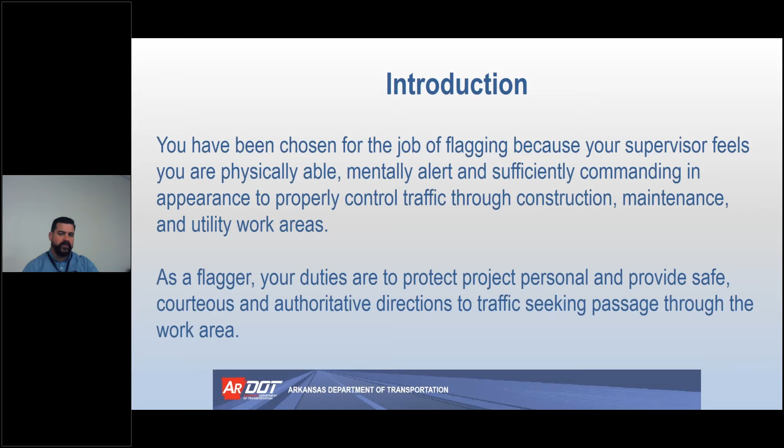Okay, moving along. So you have been chosen for the job of flagging because your supervisor feels you are physically able, mentally alert, sufficiently commanding in appearance to properly control traffic through construction, maintenance, and utility work areas. As a flagger, your duties are to protect project personnel and provide safe, courteous, and authoritative direction to traffic seeking passage through the work area.

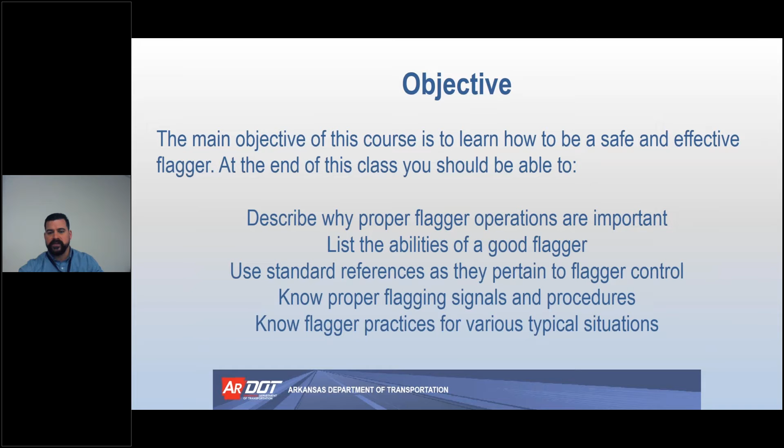The objective of this course is to learn how to be a safe and effective flagger. At the end of this course, you will be able to describe why proper flagger operations are important, list the abilities of a good flagger, use standard references as they pertain to flagger control, know proper flagging signals and procedures, and know flagger practices for various typical situations.

So let's start off with what depends on you. Well, first and foremost, the folks working need your protection. You're the first line of defense to the folks working behind you in the work zone. Motorists need you, they need your guidance. Pedestrians, similar to motorists, are going to need your guidance as well.

There's potential for pedestrian crosswalks to come across temporary traffic control zones, and you're going to need to know how to navigate those pedestrians through there, within a parameter. You're not a crossing guard, but your role will help them. Same goes with bicyclists and children. They may pass through a temporary traffic control zone as well. There may be a bike path. Again, you're not trained to direct students in a school crossing. In a lot of areas, that's a program that employs crossing guards.

How about equipment and materials? You also need to protect those. Both equipment and materials are expensive, and we don't want anything to happen to that investment.

You have the power to affect people's lives. Did you know that each year hundreds of people are killed or injured in temporary traffic control zones? Thousands are injured and millions of dollars are lost in property damage. The decisions that you make and the actions you take can be the difference between life and death.

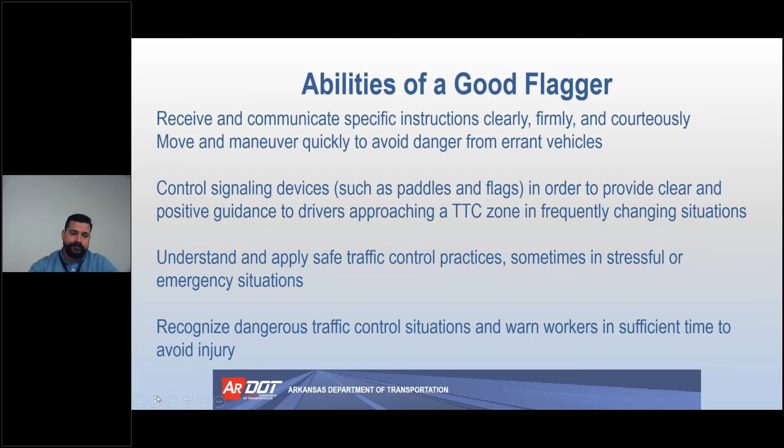So let's talk about standards and guidelines. Everything we're going to talk about today can be found in a number of places, but its origins are in the Manual on Uniform Traffic Control Devices, or better known as the MUTCD. You may have worked with the MUTCD before, or you may have worked with your local best standard practices, but everything originates from the MUTCD.

Even OSHA pulls their temporary traffic control information from the MUTCD. The MUTCD is a document required by federal law to be prepared and published by the U.S. Department of Transportation and the Federal Highway Administration. It changes frequently and is published primarily for state DOT use. Each state is required to use this manual, or one of their own design, for all traffic control on streets and highways under all circumstances.

So the MUTCD is basically the Bible of traffic control. The flagger control is just one part of it, and it's covered in Part 6. These standards may also be found in state and local standards and guidelines, which are particular to the state and area in which you will be working as a flagger. If you work in a number of different areas, you may be required to work according to those local standards and guidelines.

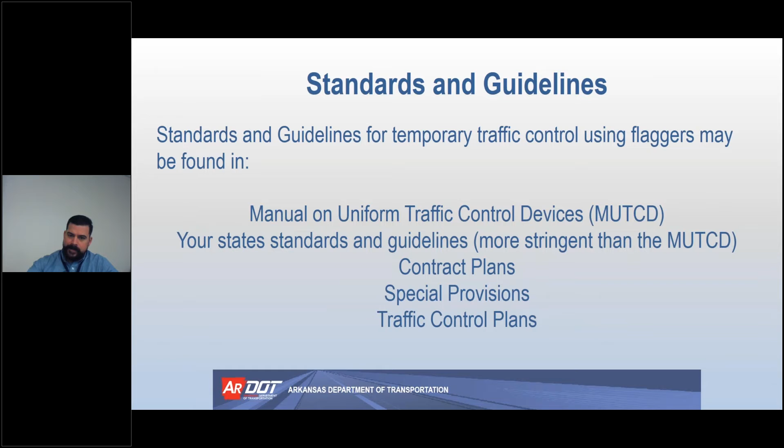And just to show you what the MUTCD looks like, here's my old ragged MUTCD. To give you an idea of size and scale, it's about 11 by 9 and about 2 inches thick. There are 9 parts, kind of like chapters, but in total the 9 parts add up to over 800 pages in this thing. So these 9 parts are pretty big parts.

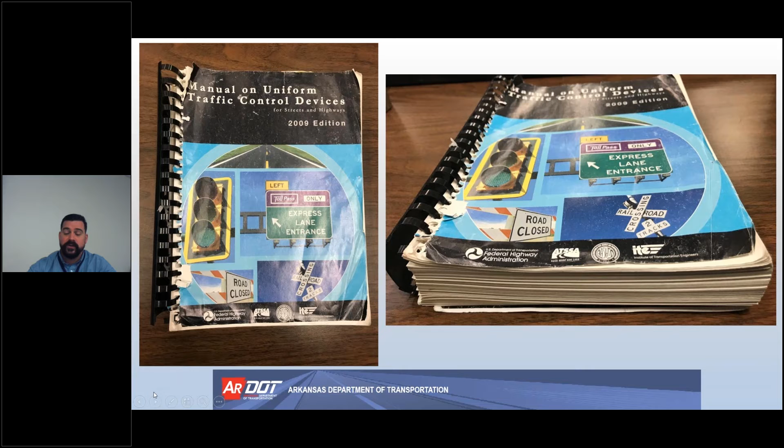Again, this is the Bible of temporary traffic control. You can see the last time it was updated was 2009, and this is the most recent MUTCD out there. I've been told that it's going to update soon, but I've been told that for a lot of years, so we'll see. Until they do, this is it.

An easy way to remember some standard key points about flagging is the flagger ABCs. Before you start flagging, you need to have your advanced warning signs out. You need to be visible and alert at all times, and you need to control traffic with the appropriate procedures. So: advanced warning signs out, be visible, control traffic with the appropriate procedures. If you can remember those three things, you're on the right track.

Okay, now we're going to get into some of the practical parts of temporary traffic control and flagging.

Before you can flag, you need to know what a temporary traffic control zone is. The entire area where traffic is affected is called the temporary traffic control zone. It includes the area from the first sign drivers see until the very last device where drivers know to return to normal traffic patterns. There are 4 primary areas that make up the traffic control zone that are important for the flagger to understand.

For most things throughout this course, and for the most part tomorrow, we're going to look at this specific type of temporary traffic control zone because it applies most to flaggers. It is called the one lane two-way traffic condition or traffic control zone, or mostly referred to as the flagger taper.

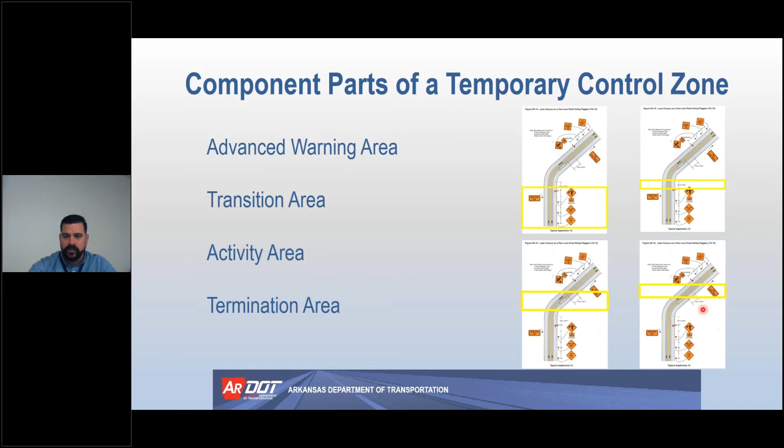Here we're looking at each one, let me get my pointer out. So here we are: the advanced warning area, transition area, activity area, and termination area. Don't squint your eyes too hard looking at this, we're going to talk about all 4 in detail.

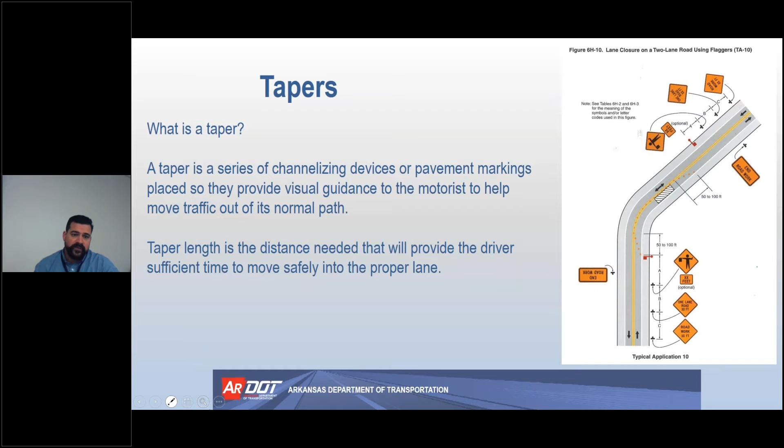More briefly, let's go over tapers. So what is a taper? A taper is a series of channelizing devices or pavement markings placed so they provide visual guidance to the motorist, to help move traffic out of its normal path. Taper length is the distance that will provide the driver sufficient time to move safely into the proper lane.

And here's the one-lane two-way taper, also called the flagger taper. I just want to show it to you in better detail. It looks like you can see it okay, I'm looking at it on my other screen. It's the most common taper used in flagging operations. You'll need to know more about tapers if you're required to place traffic control devices and make sure they are set properly.

But being familiar with this and other types of tapers, especially when we talk about them tomorrow, you'll be familiar, because if you feel something is not right, you need to notify your supervisor immediately that something isn't set up right.

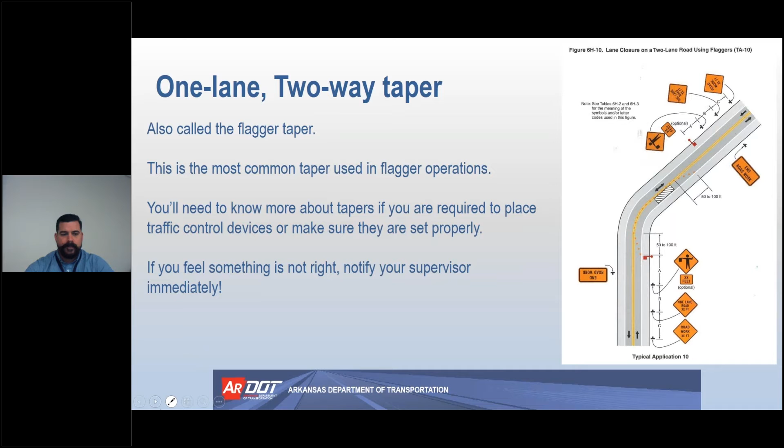All right, so the advanced warning area. The advanced warning area is the first indication to motorists that they are about to enter a work zone. Signs are primarily used to communicate several things to the motorist.

The first sign, so if traffic is coming this way, this is considered the first sign motorists see. It's a warning sign. Generally, the road work ahead sign is used for that first sign. Sometimes they'll substitute that out with a distance instead of ahead, so road work 1,000 feet ahead or something like that. This is there to alert motorists that they are approaching a work zone.

The second sign is placed to inform motorists of what is expected ahead. So, for example, one lane road ahead, or similar to the road work ahead, one lane road 500 feet - that's also acceptable. Then the third sign should be the flagger. The third sign is placed to tell motorists what to do. So there's a flagger ahead, or the flagger ahead sign with a distance, so flagger 300 feet ahead, or just the flagger man, as we'll call them. You'll also see that sign as well. But that flagger sign, it's telling motorists hey, there's a flagger there, and that sign has to be up before you can even start flagging.

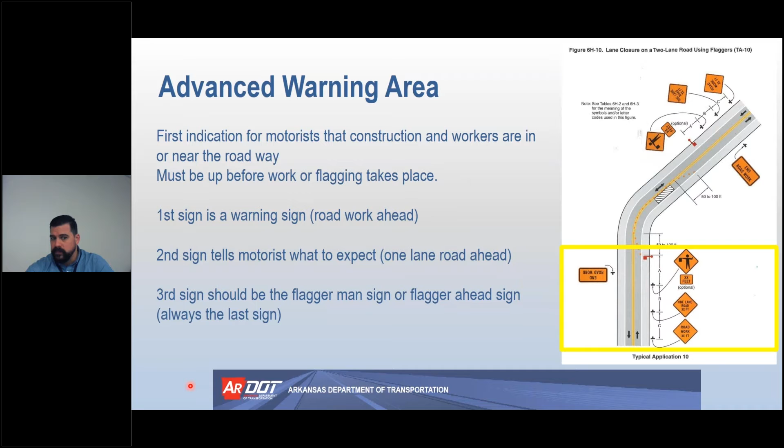Okay, so a little bit more on the advanced warning area. The distance, so the sign spacing between each sign in the advanced warning area is depending on road volume type. This table 6C-1 is found in the MUTCD. Like I said earlier, flagger and really all temporary traffic control is found in part 6 of the MUTCD, and you can find this chart in there.

I'd like to also say that you can find the MUTCD online for free. It's accessible to anybody. Just Google MUTCD, and you could even get more specific. Google table 6C-1, MUTCD, all this information. It's not secret information, it's very accessible. So if you have questions and don't feel like pulling out this big old book, just Google it.

But here we're talking about the distance between each sign. So the distance between road work ahead, one lane road ahead, flagger man sign, in the advanced warning area, that's all dependent on speed. Urban low speed is 100 feet between each sign. So 100 feet for roadwork ahead, 100 feet one lane road ahead, 100 feet between flagman ahead.

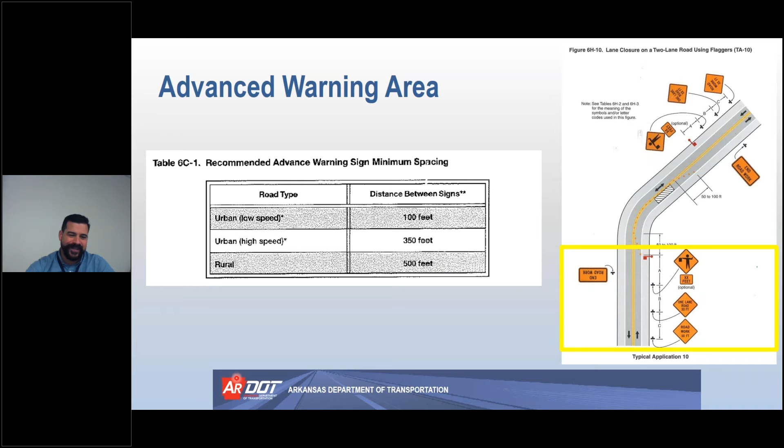All right, the transition area is the area that follows the advanced warning area. So again, we're looking at the flagger taper. The standards I'm going to talk about now are specific to the flagger taper. We'll talk more broadly about transition areas as we look at more tapers, and that'll be tomorrow's course. But for the transition area for the flagger taper, it follows the advanced warning area and is where the motorist is directed to travel in order to get through the work zone.

Motorists need time to make changes in the roadway, so in order to provide time, we provide a distance. This distance is called the taper. This is the distance right here. It is a line of channelizing devices that is visible and provides driver guidance. The length of the taper is measured along the line of travel, which is here. So you're not measuring this diagonal taper, you're measuring along this line here, or along the shoulder.

Flagger operations are normally done on roadways with speeds between 20 and 55 miles per hour. Again, if you start getting to 60 miles per hour, no flaggers, that's too dangerous. So the taper length is used in the range of 50 feet minimum to 100 feet maximum. At the lower range of speeds, the 50-foot taper may be used, with the longer taper being used as the speed increases. So essentially, lower traffic speeds, you want a shorter taper; higher traffic speeds, you want a longer taper. That's to give motorists more time to stop—the faster they're going, the more time they need to stop.

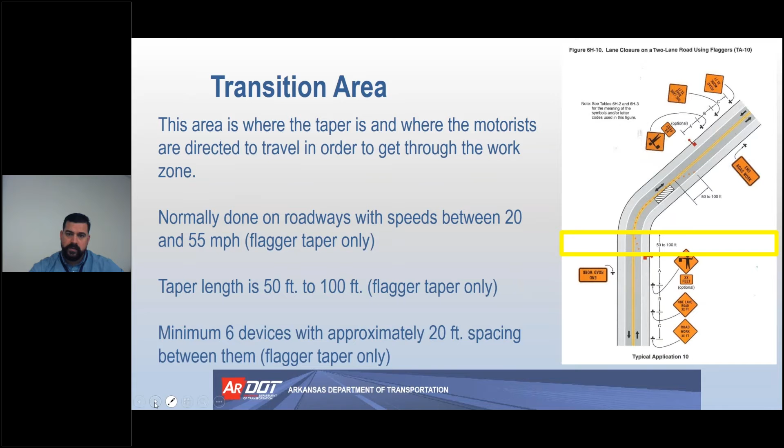We're going to talk about that in more detail here in a little bit. So we have the advanced warning area, the transition area. The next area of the traffic control zone is the activity area.

The activity area follows the transition area and is made up of the workspace and the longitudinal buffer zone. The workspace is where all the manpower, equipment, maneuver room, and storage materials are contained. The space is determined by the project and is generally not the responsibility of the flagger to determine how much space you're going to need for the activity area.

The workspace is preceded by a distance called the buffer space. It is an area or space providing motorists who may have lost control of their vehicle the room to recover and stop before entering the workspace. This space is always kept empty of any objects that could cause damage to vehicles or occupants.

At this stage of the MUTCD, the buffer space is not required in temporary traffic control zones. It's an option, recommended but not always feasible. Space is always an issue when working on the road, so sometimes a buffer space isn't possible. But if you do have one, and it's recommended if you can, there's nothing in it.

All right, the activity area. Let me get my pointer out here. So here's the buffer space—nothing in it, right? And this box with diagonal lines is considered the workspace. There's nothing in here; this is where everything goes.

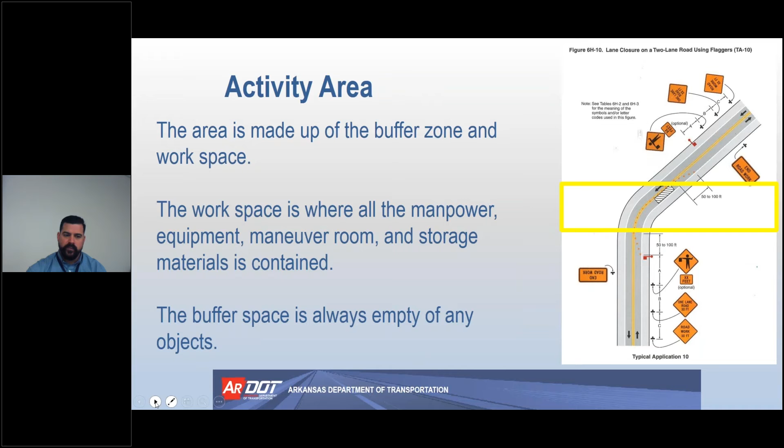A little bit more about the buffer space. Here's another table found in the MUTCD, Table 6E-1. It has a really fun name: Stopping Sight Distance as a Function of Speed, more easily known as the buffer space table. The distance to use for the buffer space is determined from the data shown in this table.

It's real easy, right? If it didn't have a complicated name, it'd just be, hey, go to the buffer space table. So first, what's the speed limit? It's 20 miles per hour. Okay, that buffer space needs to be 115 feet long. And that's all there really is to it.

Generally, flagger tapers are going to be in a travel way with speed limits of 50 miles per hour, so that buffer space is going to be 425 feet. It's not a difficult table to read, just that sometimes that title will throw folks off. But I bet if you Googled buffer space table, this would pop up.

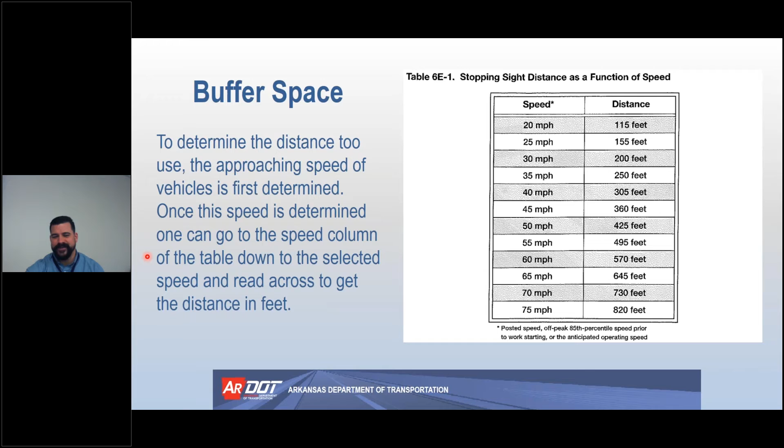And lastly is the termination area. In the termination area, information is provided to the motorist to indicate that traffic has come to the end of the project. A sign such as End Road Work or End Utility Work, or whatever activity is taking place that the temporary traffic control plan recommends, is placed at the end of the termination area, at the end of the temporary traffic control zone.

It needs to be clearly visible, but similar to the buffer space, this is not required—it is recommended, but you don't have to have one out there. But if you do, it needs to be clearly visible and clearly indicate what is happening. A termination taper or downstream taper, when used, helps folks move back into the regular travel path, similar to the flagger taper at the transition area—that was 50 to 100 feet, and this termination taper is also 50 to 100 feet. Really easy to remember.

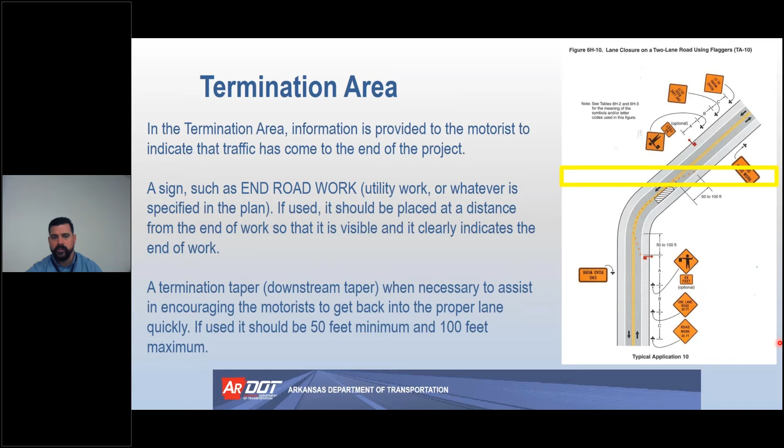All right, so channelizing devices. Channelizing devices mean delineation of the edges of the travel path that provides visual guidance to the driver. It is equipment used to divert traffic from its normal path. Channelizing devices are essentially cones, drums, tubular markers, and barricades. I'm sure everybody here is familiar with them, but like I said earlier, depending on the situation and what the traffic control plan recommends will determine what channelizing devices you use. We'll talk about each one of these briefly.

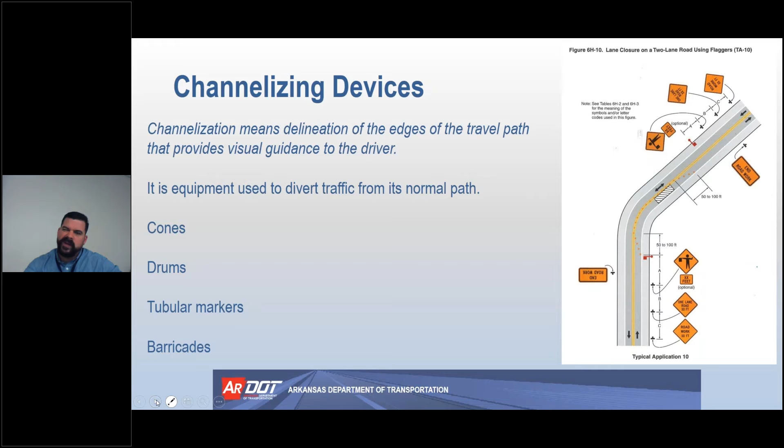First off, cones, probably the most familiar channelizing device there is. Even the layman knows what a cone is, but most cones are predominantly orange. In fact, most signs and devices in a temporary traffic control zone are orange. It's the main color, synonymous with construction and maintenance.

Why do you think these colors are important to channelizing devices? Well, they allow the device to be seen and to stand out. Cones must be a minimum height to be seen as well. They must be at least 28 inches high on high-speed roads, so roadways where the speed limit is 45 miles per hour or more, or they need to be 28 inches for nighttime work as well.

And they need to be at least 18 inches tall on other types of roadways. If cones are used at night, they need to be seen, so they must be either lit externally or retroreflective. In fact, I've actually seen cones that are internally lit.

If anybody has any questions about what retroreflective means, if you wear a safety vest, you probably know what retroreflective means. But essentially, retroreflective material is light from a source that will bounce off an object and return to the source. Most cone manufacturers will put bands of white retroreflective material around the top of the cone. While not required for daytime work, nighttime work requires some form of light, retroreflective or internally, externally lit.

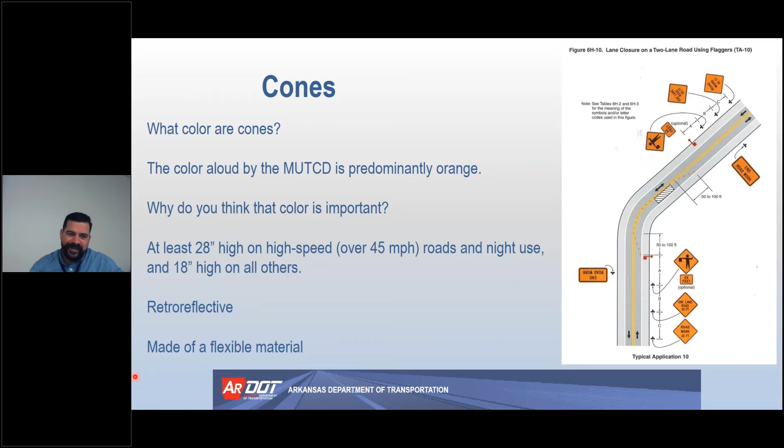Signs. Other temporary traffic control devices you'll see on the job are signs. There are three basic types of signs: regulatory, warning, and guide signs. Regulatory signs enforce legal requirements, so we're talking about a stop sign or a speed limit sign. Warning signs alert drivers to specific hazards, so we're talking about a flagger ahead sign or flagger man sign.

And guide signs give drivers information, so in that case we're talking about an end road work sign. Signs have different shapes and colors, which convey different meanings. So again, what meaning does an orange sign convey? Temporary traffic control. And for the most part, temporary traffic control signs are diamond shaped.

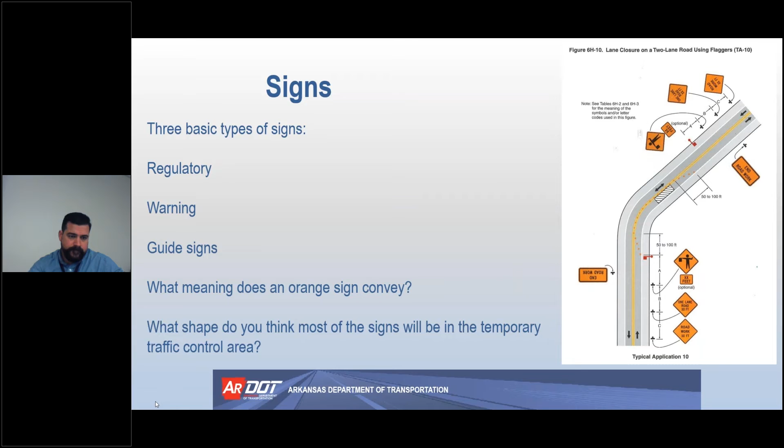Traffic control plan. So we've kind of hit on this already a little bit. The traffic control plan may show the exact sign required or refer to a number sign in the MUTCD. You'll need to check the plans or ask your supervisor to ensure the correct sign will be used. Essentially, the traffic control plan tells the person setting up the traffic control what needs to be where, in what location.

Before you get out on the road, you should have a traffic control plan. I know that doesn't always happen, but it should. And the traffic control plan doesn't need to be this drawing done on CAD, that's colored and numbered, and it doesn't have to be anything too detailed. It just needs to give a framework of what needs to go where on the roadway.

It not only needs to have what signs need to go where, but it also needs to say what that sign's spacing is and how many channelizing devices are along the buffer zone and the activity area. Is there a buffer zone? That also needs to be in the traffic control plan. Is there a termination taper? That needs to be in the traffic control plan.

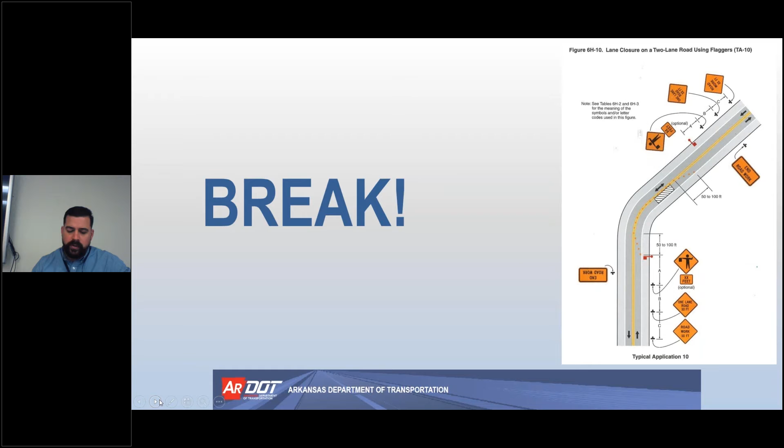Now we're going to move into what you need to have out there with you as a flagger. So first we'll hit on equipment or apparel.

For daytime work, the flagger vest, shirt, or jacket shall be either fluorescent orange-red, or fluorescent yellow-green, as defined in the standards. ARDOT, so I can speak to ARDOT, we use the fluorescent orange, but I know contractors really like the fluorescent green, fluorescent yellow. Your agency or municipality is going to determine and tell you what you need to wear, and it doesn't matter the color, but it needs to be within that range of colors. It's whatever color your agency or municipality tells you to wear.

For nighttime work, similar to outside garments, they need to be retroreflective. The retroreflective material shall be either orange, yellow, white, silver, yellow-green, or a fluorescent version of these colors, and shall be visible at a minimum of 1,000 feet. Apparel for daytime and nighttime needs to be ANSI Class 2 standard.

For nighttime work, it's encouraged that you use a Class 3 standard, but it's not mandatory. And that's always surprising - I've been saying that for years, and it's still surprising every time I say it. Now for ARDOT, we require Class 3 no matter what.

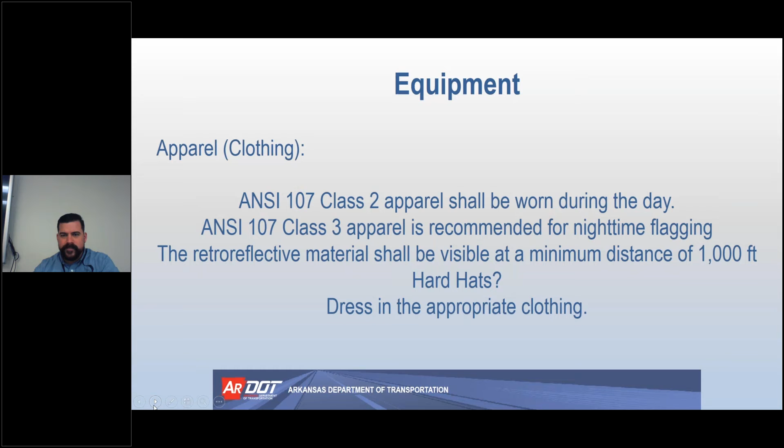And actually, if I don't have an answer to a question, I have got one of the senior health and safety officers sitting right in front of me who can answer questions. His name's Jason, and he came out of maintenance and has been in the safety role for a long time, so he can always provide us with his insight.

All right, moving along. Ross, sorry to interrupt, we did have one comment from Greg that says OSHA requires class 3 at 55 miles per hour and up. Okay, that is news to me. I wonder, is that a new standard, Greg? Or is that something you guys have done for a while?

I don't know what I did here, but okay. Part of the reason why I might not be really familiar with the OSHA standards in terms of that is ARDOT is actually OSHA exempt, so there's some confusion there at times.

Okay, and so he said that he will find the regulation and send it over to you. Great, thank you. Since everyone online is muted, we're just depending on the typing into the questions in the chat. Thanks, Greg, I appreciate that.

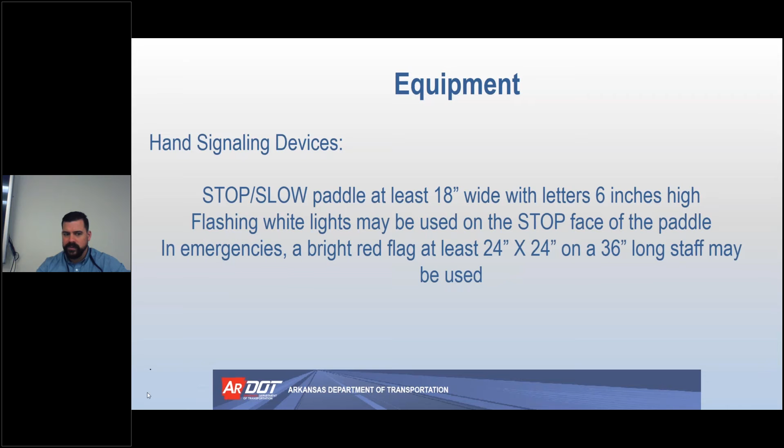What about personal comfort items? Depending on the day, the situation, what's going on, you're going to want to have different things out there with you. It can be pretty miserable flagging at times, so let's try to make it as comfortable as possible. The bug spray, right?

Especially in the summer, Arkansas can have some pretty rough mosquitoes, some pretty aggressive mosquitoes. Other things, ticks. A few years ago I was doing a field inspection, and the flagger told me he was standing away from any vegetation on the shoulder, and he was telling me that ticks were walking out of vegetation across the shoulder to get to him. You're not going to be a good flagger if you're itching, getting bit, running from ticks. It's okay to have bug spray out there with you.

Same with sunscreen. ARDOT has become a huge advocate for sunscreen. We're giving sunscreen to all of our crews, we're doing safety meetings on sunscreen. You don't want to sit out there in a short sleeve shirt and no hat and just get baked by the sun in the summertime. Skin cancer is real, and you should do everything you can to mitigate that risk.

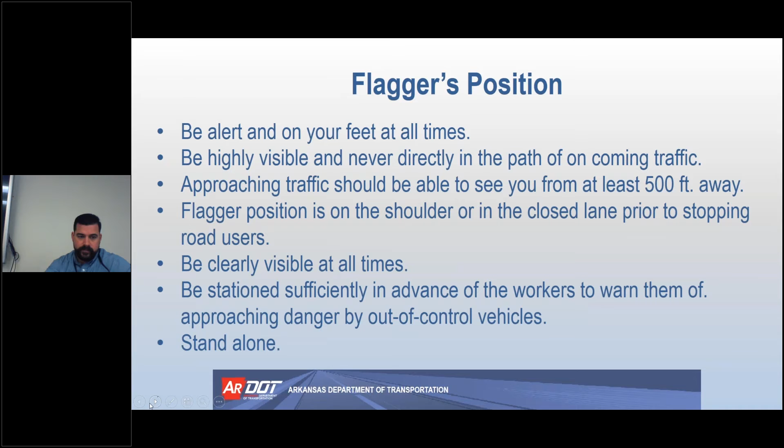Okay, so flagger station location and position: there are three critical factors in selecting the flagger station. You need to identify the limits of the workspace. That's going to be determined by your temporary traffic control plan, and that's up to your supervisor or engineer—they'll say this is where the location needs to go and how much space you need for the workspace. It's usually not up to you as a flagger.

You're going to need to determine the speed of the approaching traffic, select the proper buffer space, and measure it from the workspace upstream. Remember that buffer space table we looked at earlier. You determine the speed of the approaching traffic, then look at the buffer space table and say, okay, it's 55 miles per hour, so the buffer space needs to be X length long from that activity area that my supervisor or engineer determined.

Then you're going to select the proper taper length. If we're going to go with the standard flagger taper, that proper taper length is 50 to 100 feet, depending on the speed limit. So if the speed limit's 30 miles per hour, why don't we just go ahead and make that taper 50 feet long? If the speed limit's 55 miles per hour, let's go ahead and make it 100 feet long.

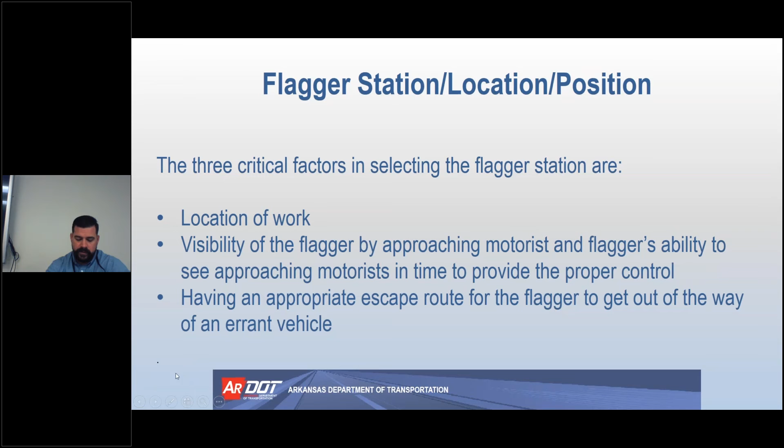Similarly, you need to get away, because while you're getting away, you're going to be yelling at everybody else working behind you to get out of the way, to watch out, there's an errant vehicle coming. So don't lean up on a vehicle. There shouldn't be any walls. Flagging on a bridge is a really bad idea. You don't want to have to jump off a bridge to get out of the way of an errant vehicle. Having an escape route keeps you and everybody else safe. Make sure you have one before you get out there.

Okay, so where should you stand? We are looking at the flagger taper again. These arrows right here identify where you as the flagger need to stand. As traffic approaches, always stand near the shoulder, near the beginning of the taper. Never stand in the open lane. So here, you're standing on the shoulder. You're not standing here, or here. If your flagger station is here, you're not standing anywhere out here. You want to be on the shoulder.

But once the traffic has safely come to a stop at a designated point, the flagger may carefully step out towards the open lane, but only as far as necessary to view the remaining approaching vehicles. Never stand alongside a stopped vehicle to talk with the driver.

So you're the flagger standing right here where this arrow is pointing, on the shoulder. Traffic is approaching, and that first vehicle is an 18-wheeler with a trailer attached. It's a beast, and it sees you, and the driver sees you. Right behind that 18-wheeler comes a little tiny Geo Tracker, okay, they still make those. A little tiny vehicle. Well, you can't see that tracker and it can't see you.

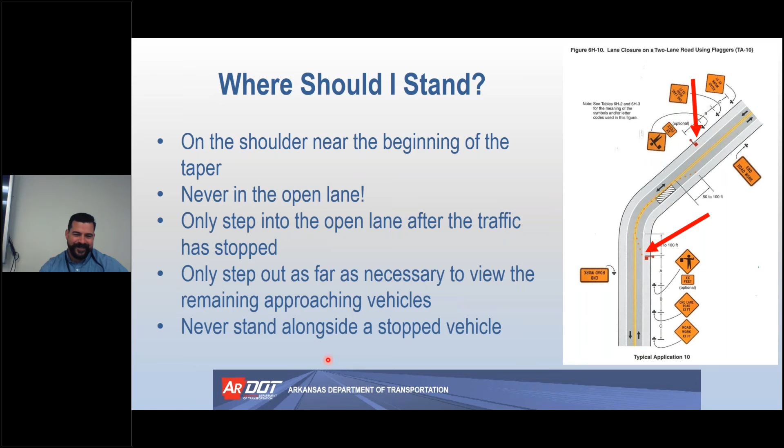So here I just kind of included this to reiterate where you're supposed to stand. There's a flagger here and there's a flagger here. You'll use two flaggers to control traffic in this flagger taper. One will stop traffic coming this way, one will stop traffic coming this way. We'll talk about that more here in a second, how you do that. But this is where the two flaggers will stand.

There are instances, very rare, well for ARDOT there are very, very, very rare instances where one flagger will control both directions of traffic. Here's where that flagger would stand. We're going to talk about that more here in a second, but utility guys actually end up doing this more, and some of you local municipalities, maybe if you're working on residential streets - it's really the one flagger is geared towards that more than anything ARDOT does, any kind of highway maintenance. But again, we'll talk about this more in a second.

So we've talked about where the flagger should stand, how the flagger should present himself, both in apparel and stature, right? You need to be commanding in stature, and no sitting. Let's look at some pictures of actual flaggers and we'll just kind of talk about what they're doing wrong. Typically I teach this class in an in-class presentation, but virtually, I'm going to ask you just to kind of talk amongst yourselves about what's wrong with each picture, and I'll explain to you what it is. If I don't say something you want to chat, type something in the chat box and just say, hey, what about this? Feel free to.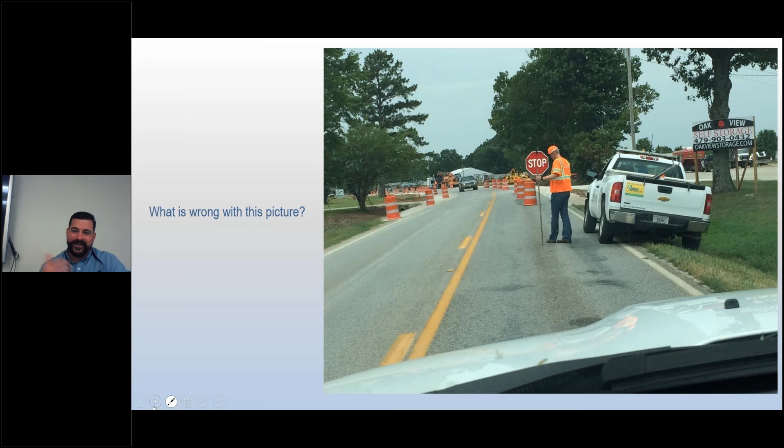This is wrong. He shouldn't be here. And I hope that district safety officer said so. I can't remember if I said it, I'm sure I probably did. Actually, I think this is in District 5. One of our senior safety officers' districts. So again, just get familiar with what not to do as well as with what to do.

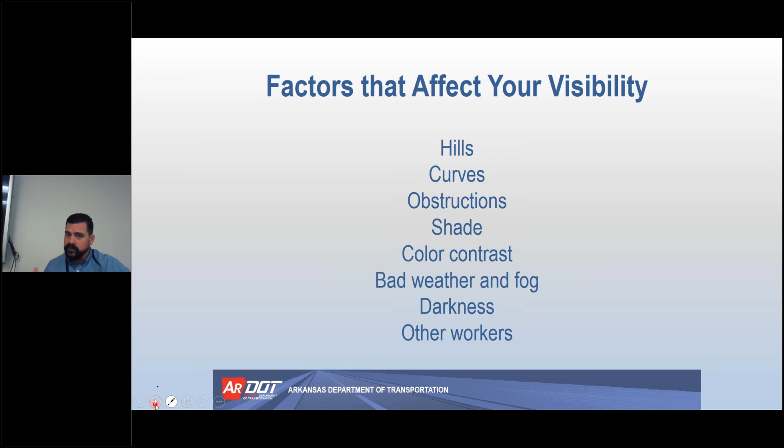As a flagger, where your station is, also with signs and channelizing devices, but traffic volume, traffic speed. Obviously, the faster traffic is going, the more room they'll need to stop. Vehicle weight, you need to consider that too.

If you're in a place where there's a lot of 18-wheelers, let's say, for an ArDOT situation, there might be some trucks hauling lumber. It might be near a place where they're removing a lot of trees, but it's on a rural road. So even if the speed limit is 50 miles an hour, or 45 miles per hour on a rural 2-lane road, if you still have a lot of 18-wheelers coming and going from a lumber yard, you need to take that into consideration.

Cross traffic movement, pedestrian traffic and bicyclists, you got to think about them. I ride a bike, and on my bike path, they're putting up some condos, and they have a flagger there. Not a good flagger, but they have a flagger there, and there's a lot of folks riding bikes going right past where they're building these condos, and that flagger, he's got to control those bikes and pedestrians as well, folks jogging as well. But you got to take everybody that's using that road into consideration.

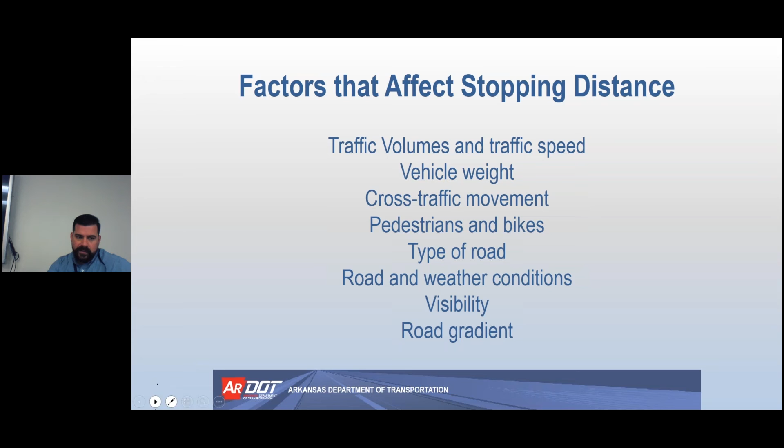So drivers with less experience are less familiar with what signs mean and what they need to do when they approach a temporary traffic control zone. We gotta take driver's age into consideration. With driver's age comes driver's experience.

On the flip side of that, you get some really old drivers. The sight starts to go and hearing starts to go, and you need all of your senses to drive sometimes, and these can create risk when some of these senses start to fail.

Just like with factors that affect you being visible, weather plays into driver's abilities as well. And attentiveness, I think you probably know what I'm going to hit on, but texting, texting and driving. These are things that you got to think about when you're out there.

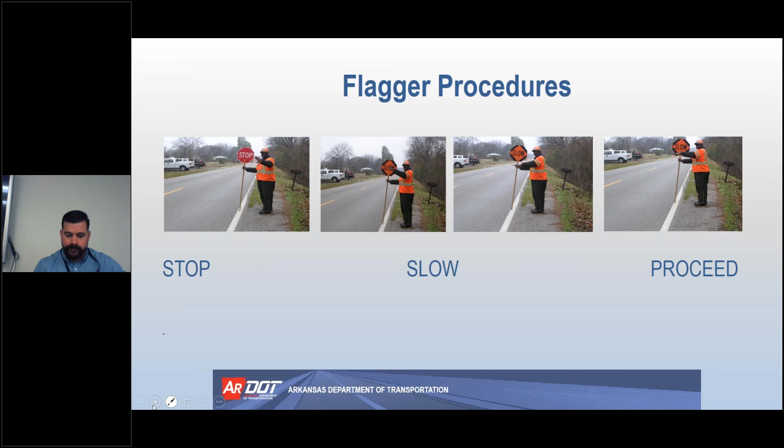So here we are, he has got traffic stopped. To stop road users, face them and aim the stop paddle toward them. Traffic is approaching him. He's got the stop slow paddle flipped to stop, and he's got his free hand out, telling them to stop. That's it. Got the stop sign showing, hand showing stop. That's all you have to do to get traffic stopped. In theory, that should be all you have to do. Where is he standing? He's standing on the shoulder of the road.

He's got the stop paddle out closest to the roadway where approaching traffic can see it, and he's also motioning to stop.

Now for emergency flagging, it's going to be similar. Let's say the truck dumps its load and you have to get out there and do some emergency flagging. It's the same procedure, it's just instead of that stop-slow paddle, you're going to have a stop flag out, holding the staff with the flag hanging down, and then stopping with the other hand.

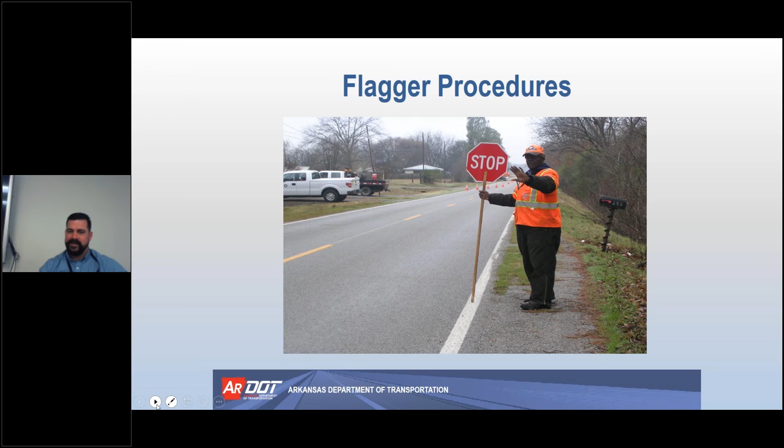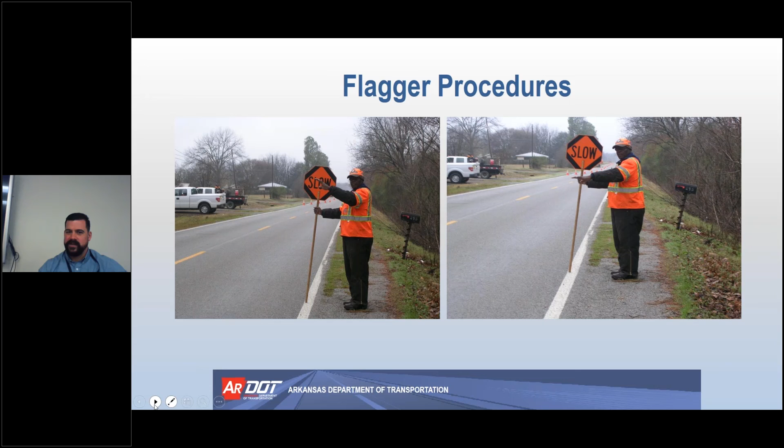So I'm going to back up again and go through them one more time, because this is really what you need to take away from this course: how do you stop traffic? How do you let traffic proceed, or slow down - I'm sorry - how do you let traffic slow down, and how do you let traffic proceed?

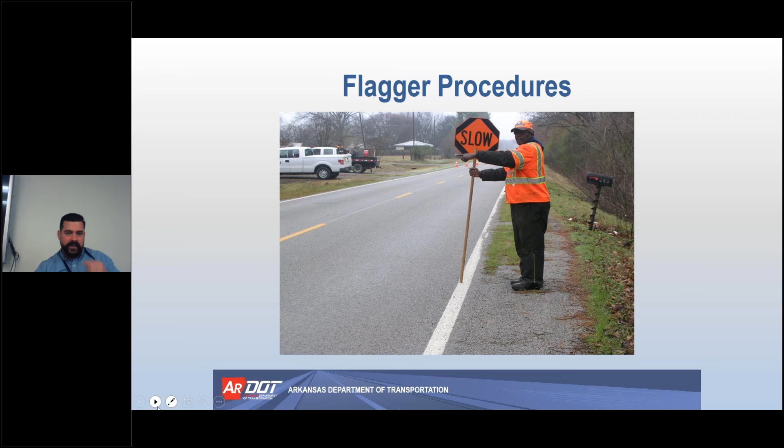And lastly, I've hit on this a lot already, but I'm going to reiterate one of my biggest pet peeves from when I was out there doing safety inspections and field inspections, making sure folks are flagging correctly: having an escape route and establishing eye contact. You need to be able to look the driver in the eye to let them know you're in control, and if they have eye contact with you, it mitigates the risk of confusion. Eye contact establishes you as a person in control, and it allows you to know if you have the driver's attention. Although extremely difficult, it is your job to control the driver, and the best way to do that is to establish eye contact. Even with that, never assume the driver sees you - it's not a safe assumption, you can never be totally sure. So that's just one more tool in your tool belt as a flagger to establish eye contact and make sure you have control.

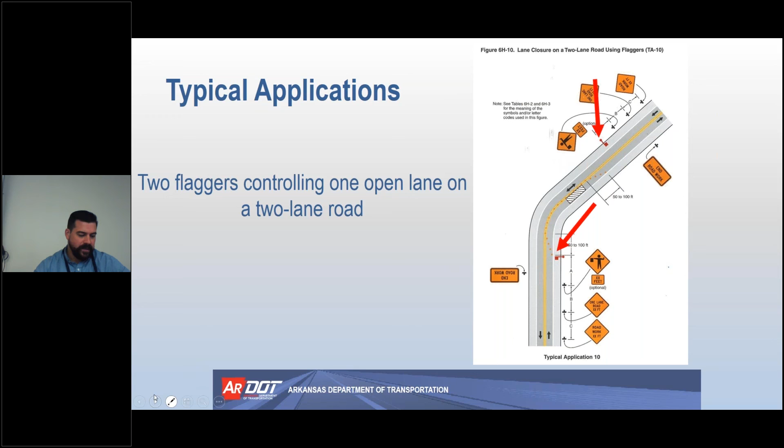I kind of briefly hit on this. This is the one flagger only situation. ARDOT doesn't really do a lot of this, but MUTCD does allow for it. When a single flagger controls both directions of traffic, the flagger should stand on the shoulder opposite the closure or workspace, or in a position where good visibility can be maintained at all times.

But 5 conditions must be met for a single flagger situation. First, it's got to be a really, really short workspace. We're looking here, this is a pretty short workspace. A low volume road, okay? Residential street is probably ideal for something like this. Low speed, again, residential street, low volume, low speed, short duration, okay? You're not going to be there that long, and really, really good visibility.

If one or more of these conditions is not present, then a 2-flagger operation needs to be considered, all right? So again, MUTCD allows for single flagger, but there are some specifics that need to be hit on. If you don't hit on all those specifics, then maybe you need to have 2 flaggers. If this is something you want to look into more, consult the MUTCD. You can probably Google MUTCD 1 flagger, and it'll probably take you right to that spec or the general area of where that spec is.

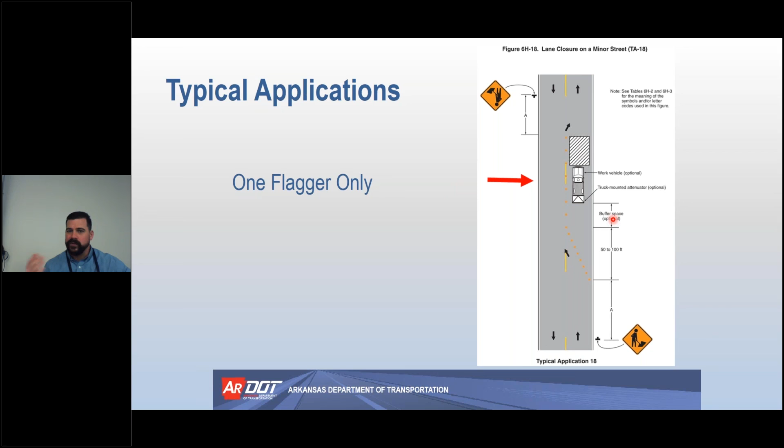Okay, so now we're going to go back to the flagger taper. Work is often performed over a long section of highway when the flagger at the opposite end is not visible to you. So if you, the flagger here, cannot see the flagger over here, a pilot car may be used to escort vehicles through the work area.

You are to stop vehicles in the approved manner as they approach, detain them until the pilot car arrives from the opposite direction. After stopping the vehicle, move to a position near the center line so they can be easily seen by approaching drivers. You can move out to the center line to control the queuing of the other vehicles, and allow traffic to come this way.

But that traffic is going to be following a truck that says 'Follow me' or pilot vehicle, and it's moving traffic through, because we could extend this buffer space and activity area for miles, and if it was extended miles, these two flaggers wouldn't be able to see each other. So that pilot vehicle is going to move folks through that work zone, and once it does, the pilot vehicle takes them through.

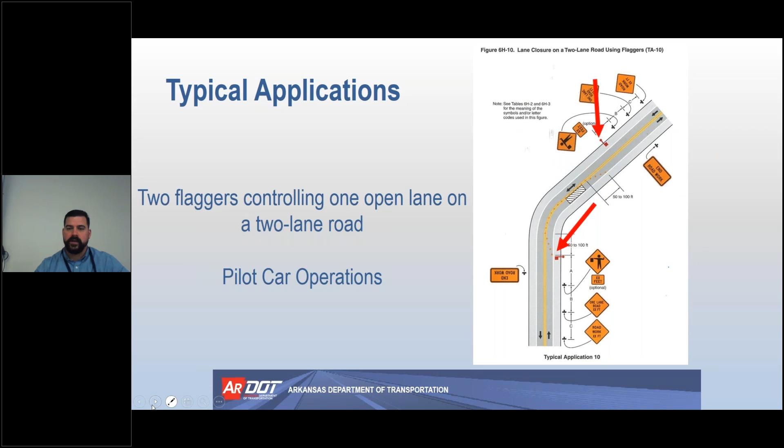Any questions? Stacy, do we have any questions about anything that I've just talked about? We do not have any questions that I'm seeing in the questions or the chat pod at this time. Okay, great. So everybody knows what I'm talking about. Good.

Okay, we're going to go over some other typical applications. So this is traffic control at a haul road. All these typical applications, this figure 6H-14 haul road crossing TA14, all these typical applications are taken from the MUTCD. And really a haul road, we're really talking about a construction entrance.

In this case, a single flagger may be used if only one lane is temporarily closed. You're going to stand in a safe spot, usually on the shoulder. You're going to stop traffic as normal. You're basically just, essentially in this type of typical application, stopping traffic to let equipment move in and out of a construction zone.

In some areas, be aware that you are there to assist contractors' vehicles into traffic. You're not controlling traffic for the convenience of the contractor. In this typical application, if you're to control traffic at a haul road or construction entrance, the traffic control plan is going to tell you what you need to do while you're out there, what your responsibilities are.

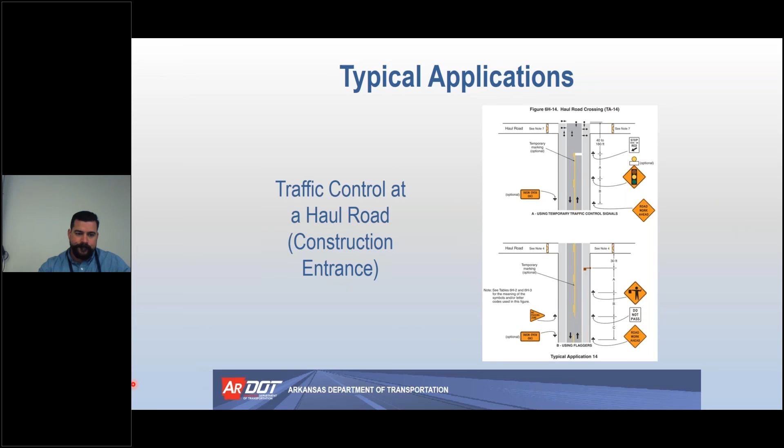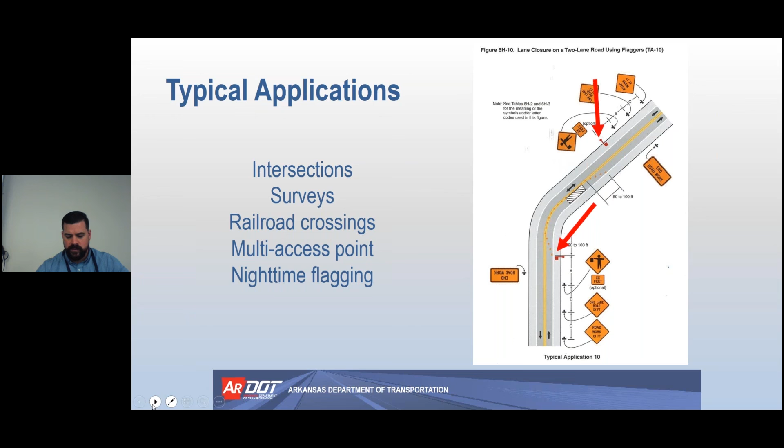Other typical applications we're going to hit on real quick are intersections, surveys, railroad crossings, multi-access point, and nighttime flagging. At an intersection, this is a crazy, wild work zone, and it requires flaggers, not flagger. There's no way a single flagger can control traffic in this type of application.

The key to intersections is communication and coordination between flaggers, but really uniformed police officers may be required when enforcement is required. Your job as a flagger is to stop and release traffic. It's not to direct traffic. You're not a police officer. This course does not teach you how to direct traffic at an intersection. You need police academy training to do that.

If you are put in this situation, ARDOT doesn't really control traffic much in this type of situation, but there would be many flaggers involved, and they would all have radios. It would be well coordinated, but there's probably also going to be law enforcement out there to help or direct.

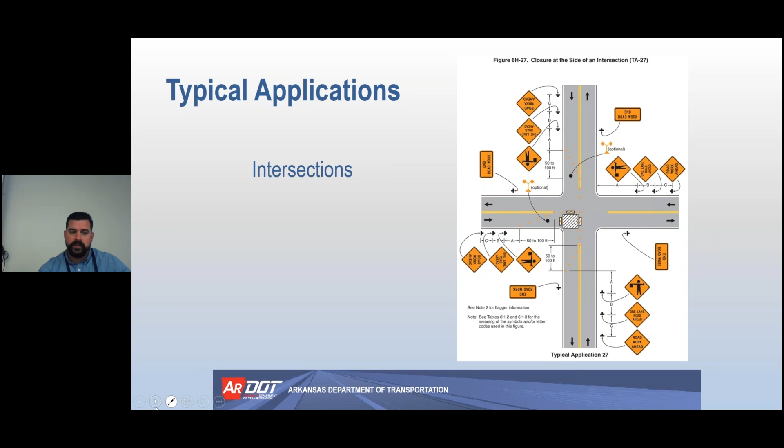Surveys. You may be asked to protect survey crews working in the middle of the road. The figure here shows the setup for surveying along a center line of a low volume road. So the survey crew is going to be set up here. MUTCD only says you need 2 advanced warning signs either direction for survey crews. Your job as a flagger may simply be to slow traffic down or give them a heads up that the survey crew is out there working.

You may have to stop traffic to let the survey guys get their equipment in and out of the roadway. If you find yourself in this situation, this is what that typical application will look like.

Railroad crossings. If a train crosses through a temporary traffic control zone, you'll need to monitor the crossing as well. Where queuing of traffic across a railroad track cannot be avoided, a law enforcement officer or flagger shall be provided at the crossing to prevent vehicles from stopping within the crossing. It's my experience, and from what I understand from the section that handles railroad here at ARDOT, a lot of times they provide their own flagger.

So they have continuous steady experience with working with railroad crossings and temporary traffic control zones. But there are times when the temporary traffic control will cross the railroad, and really the only thing that's off here is that railroad. From a typical flagger taper, the signs are set the same, flagger's here, there's the flagger set up. Everything looks the same, you just have a railroad crossing in the middle of it.

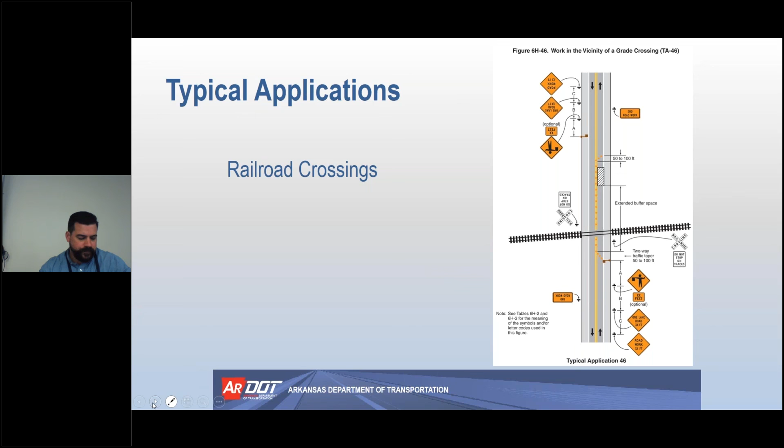Multi-access points. In urban areas and some rural areas, there will be driveways to homes and businesses or even other roads between you and the other flagger. These access points should be controlled or detoured. Inspect the project for problem areas, including setup, before you begin flagging. All access points need to be controlled by flaggers. So if you have a driveway or a side street that enters your work zone, you need to have somebody controlling that side street as well, with everybody communicating, if not visually, then with radios.

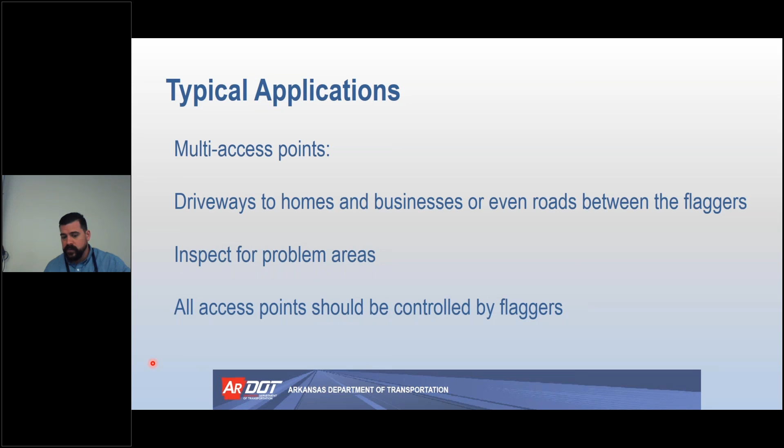Nighttime flagging. Driver's vision is greatly reduced at night, making nighttime flagging more dangerous. To alleviate the problem, utilize retroreflective or illuminated signs and channelizing devices, and make sure that you're clearly visible at all times. Nighttime flagging, your stop slow paddle needs to be clearly visible. You need to be illuminated. You as the flagger need to be illuminated. Channelizing devices should be retroreflective or internally lit if that's something you have access to.

If you're going to be illuminating the stations, floodlights are commonly used to illuminate the work around the station. Make sure they don't blind oncoming traffic, though. If you're going to be using floodlights, they need to be on you, not in the eyes of the driver. One difference when working as a flagger at night is the use of a flashlight or wand with a red light instead of a red flag, and there's these red wands that are internally lit. There's different hand procedures for that, but they resemble the red flag. So when stopping traffic, move the lighted flashlight/wand in sweeping motions back and forth across the front of your legs, kind of like an incomplete pass in football.

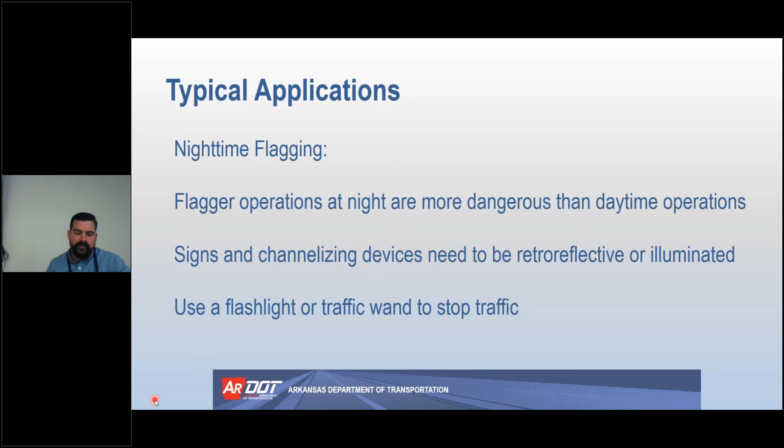Let's talk about emergency vehicles real quick. As a driver, you may have been taught to always give emergency vehicles such as ambulances, police, and fire trucks the right of way when driving. The same principle is true when flagging. Basically, you want to allow emergency vehicles to pass as soon as possible. You don't want to, however, lead these vehicles into oncoming traffic.

If you're flagging with two flaggers communicating by radio because there's a good distance between the two of you, and you've got traffic coming one way and an emergency vehicle coming the other way, you want to be really aware of how you're releasing traffic and those emergency vehicles. You don't want to do it simultaneously. You don't want to create another accident when the emergency vehicle is trying to get to another emergency situation. Be alert for emergency vehicles. They have the priority rights. Allow them to pass as quickly as possible.

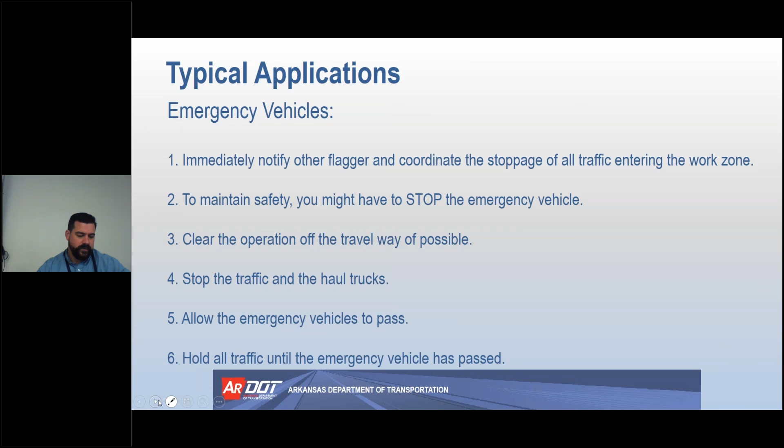So, communication is key when it comes to emergency vehicles.

Again, protect yourself with emergency procedures. You got to protect yourself, you got to protect the workers you're with. Got to have an escape route. Should an errant vehicle head your way, protect yourself first. Get the vehicle description, notify your supervisor.

Should an errant vehicle come your way, you need to run and get out of the way. As you're running, you need to be letting the workers behind you know there's an errant vehicle coming. A lot of times we allow air horns to be used, so hit that air horn and let everybody know what's happening. A whistle around your neck is also a good idea, and as you're getting away, also just yell too, right?

But when that happens, if you can, get a description of that errant vehicle, write it down on that pen and paper I said you could have with you earlier, and give it to your supervisor. Your supervisor will contact the appropriate authorities and let them know. If you can get the license plate too, that would be ideal. You get the information, you pass that along, and that gets handled further up the ladder.

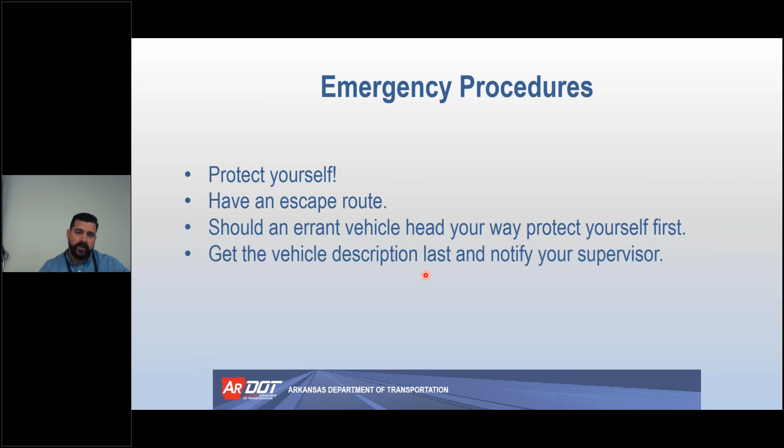So real quick, rules of conduct: don't abandon your post unless somebody is there to relieve you, unless you're switching out flaggers, but don't just leave. Don't hang out around your vehicle. Don't engage in arguments with people in vehicles. If they have a question about what's going on, answer that question, but don't get into conversations or arguments. If a driver refuses to obey instructions, don't desert your post—get that information and pass it along to your supervisor.

When you're not flagging, remove all your signs. You don't want people to associate a flagger sign with a flagger not being there—if the flagger sign is up, there needs to be a flagger. You should always be alert for the needs of emergency vehicles and crews as well. They have the right of way, but make sure the coast is clear before you let them pass.

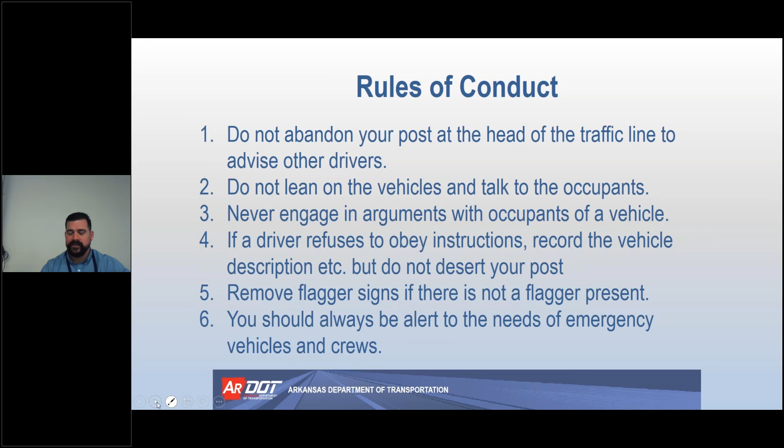And that is it. In-person, I would give a flagger demonstration test, but because we're doing this virtually, I can't really do that. So I'm just going to go through these questions very quickly—talk amongst yourselves, I'm going to give you the answers, but we'll just use this as a review, okay?

So where is the flagger station typically located? On the shoulder, out of the roadway, at the beginning of the taper, okay? Where should the flagger stand when releasing traffic? Again, on the shoulder, out of the roadway, at the beginning of the taper. Never want to release traffic when you are standing in the lane.

When is it okay for the flagger to cross the center line of the roadway? Never—you never want to cross that center line. You can go up to it, but never over it. When is it acceptable to lean against the truck while flagging? Never, don't ever do that. I'll take your picture.

And what is the proper way to deal with a difficult or errant member of the traveling public? What if somebody's giving you a hard time? You always want to be kind and courteous. Don't engage in an argument, don't get caught up in a conversation. With your pen and paper, record that driver's information, the license plate number, vehicle, and give that information to your supervisor—it gets handled further up the road.